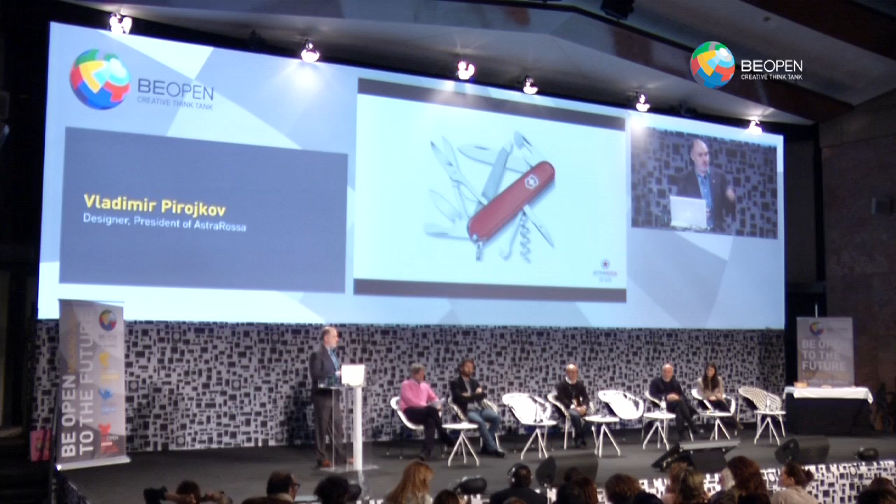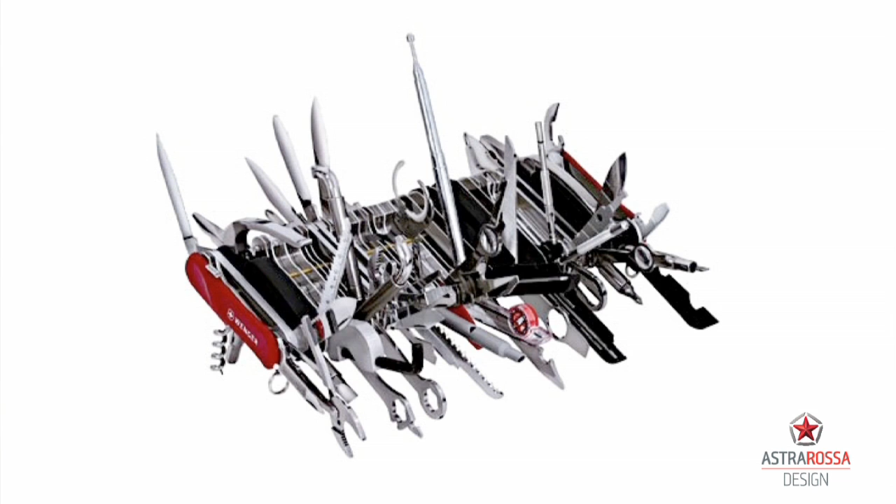If I will show you this little thing, when I was a kid I wanted to have one of this. Then things become more complex, and even more complex. If I ask you what this is, maybe you will think about it. But then things become even more complex, and that's all our life basically. We are not anymore realizing what this is - maybe it's a radio, maybe it's a flash card, or whatever.

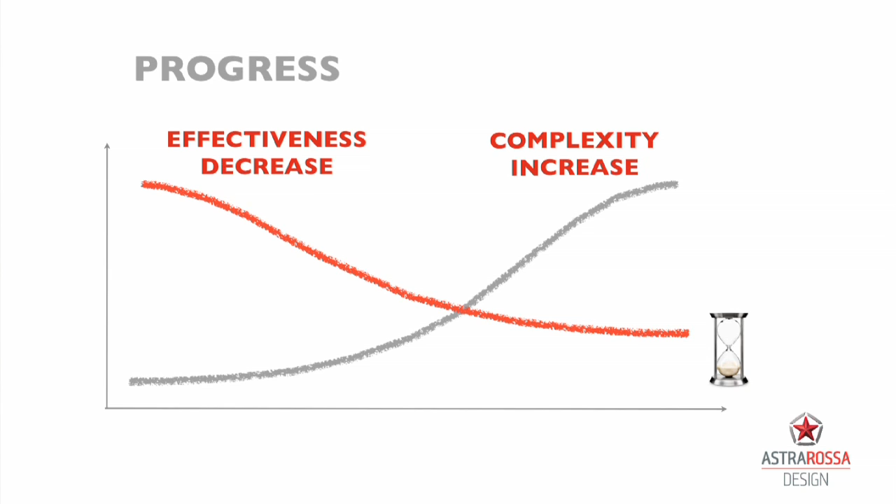So if you look at the situation, the more complex things or processes are, the less effective they are. So the time is to make things simple. Basically, this is about the control of complexity. And if we can control the complexity, then we are winners.

And how we can see this, for example, for our little knife - the control of complexity relates to the size of the hand. The bigger the thing is than the hand, it's not a knife anymore.

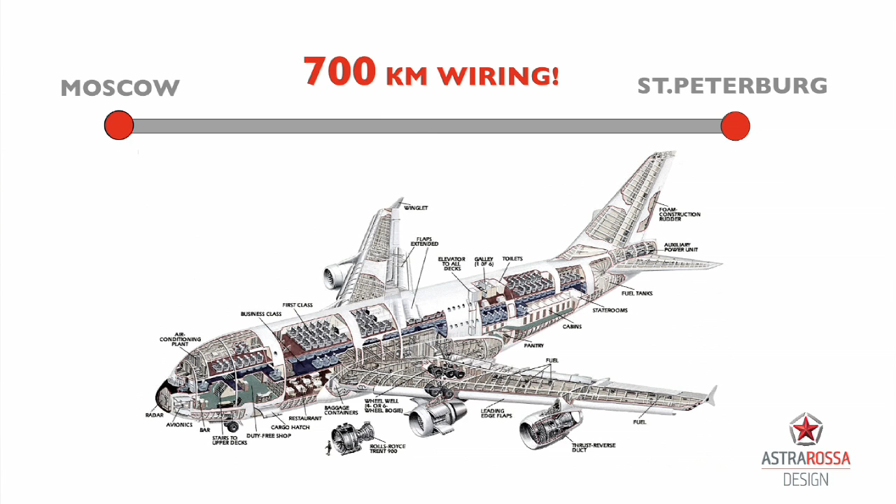So if you look at the modern airplane, it's about 700 kilometers of wiring inside the airplane - like the distance from Moscow to St. Petersburg. In order to certify the A380 airplane, it took 6 years to try to understand where the wires are. In the Boeing, there are about 3.5 million certified parts. These are very complex objects.

So what we can do, our exit from it and our solution, is innovation. If you look at this simple thing, if we go progress, progress, progress, and at one moment when we control the complexity and stop going even more complex, we can jump to another physical system.

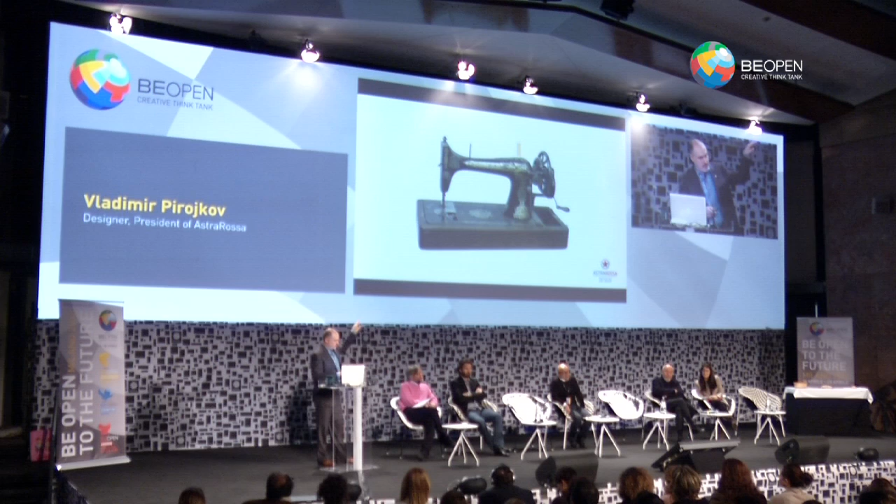For example, if you look at this thing, guess what it is. You think it's a sewing machine - maybe, maybe not, but it's the very first sewing machine from Singer. This is modernization of this machine - about 50 years between the first and second one. This is the modernization, but this one is already not very good because it's electric. If I go back, this one works on bread and meat.

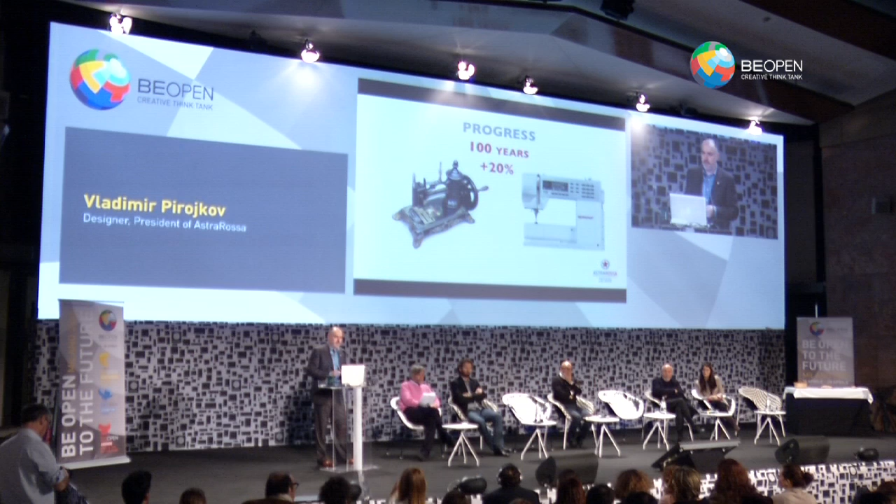But this is innovation. So if the thimble has a nano surface - super complex and very, very expensive thimble - it's not at all like the very first sewing machine. Basically, this is the jump. This is 100 years of progress, of modernization, and we have about 20% of effectiveness gain in that 100 years of time.

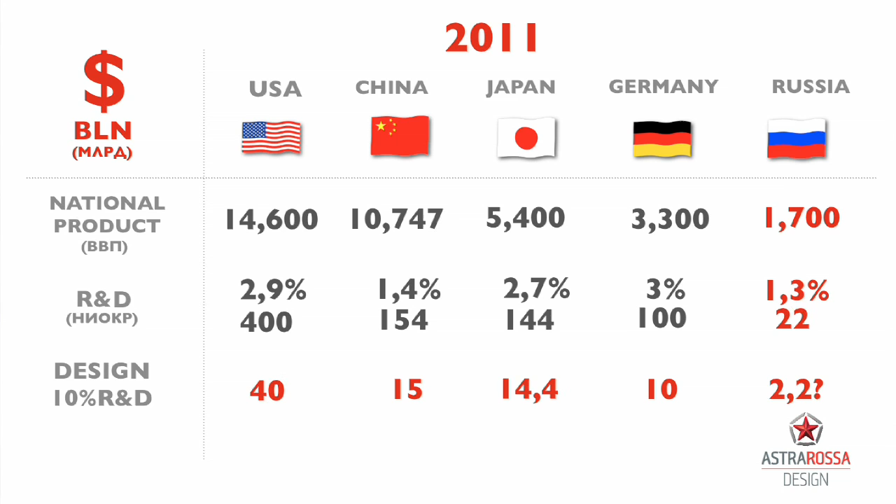We can talk about innovations as much as we want, but countries are investing different money in it. If you look at the national product, this is the size of national product, and this is R&D investments. I won't talk about design because different countries have different approaches. But if we compare, for example, America and Russia, there's a very different level of investment in innovation.

So our choice in Russia, because I'm from there, our choice is only innovation. We cannot modernize things because America, Japan, and Germany are going very fast forward. We have to catch up. So our choice is between progress or innovation, and we chose innovation.

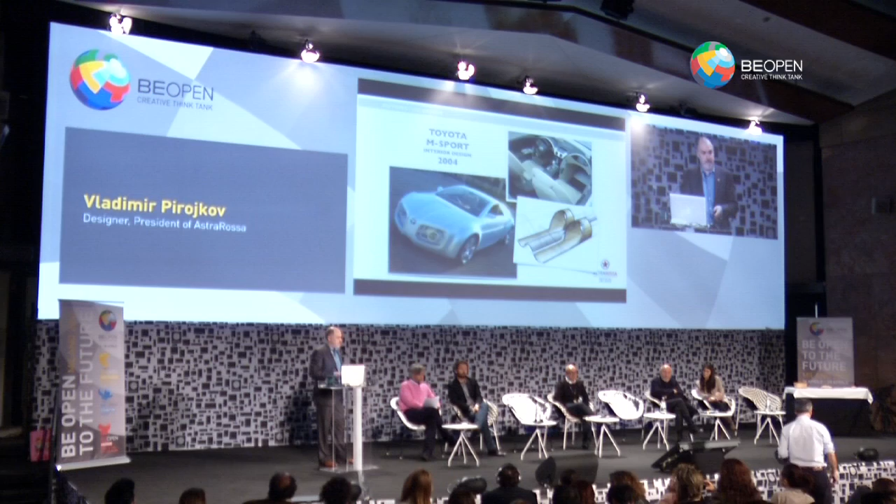Very quick about our background. I used to work as a car designer, and maybe some of the cars here you will recognize. It was a team which we were working together. Before that I was working at Citroën, and after, as we all grow, we go to bigger companies. I went to Toyota, doing Lexuses, Toyotas, and many different cars. You can do cars for all your life, doing 20, 40, 100 cars, and that's all the cars we participated in.

In the end of the day, I ask myself, what am I doing? I'm doing another car, another car, another car. Finally, we end up with a choice: I can do another 100 cars, or I can do something different for the human being.

And there we go to the question of happiness. For example, you are working every day at the company, you go in there and say, I'm doing cars, it's cool, it's really a dream, I'm a car designer, a really happy job. But in the end of the day, you say, am I happy? And I say, maybe not anymore, because I'm doing another car. You may be doing another shoe, or something exactly the same as yesterday.

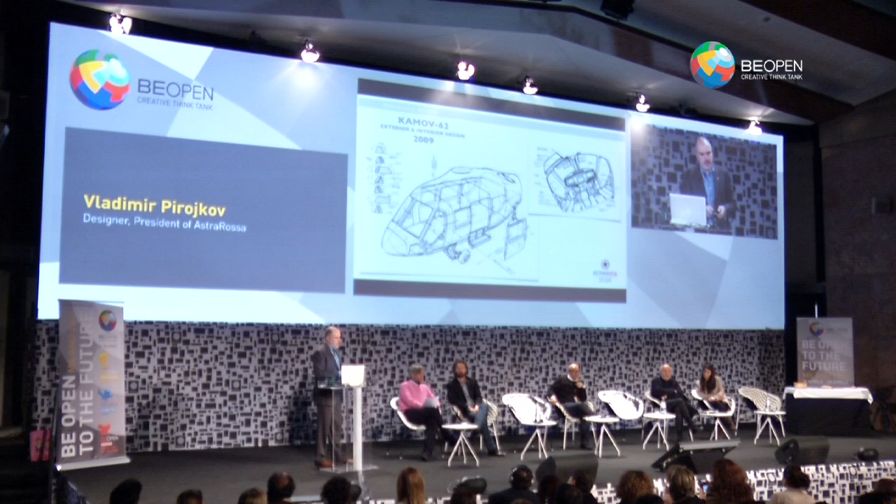So for myself, I chose to go the innovation way, and we started to work with the aerospace industry. These things are very simple, and they are also part of the modernization way. This is the job we were doing: helicopters, airplanes, but they are always the same.

This is an interesting thing. We started to think about the future, and in Russia we have a very serious situation with the Arctic North Sea. Very soon, when the ice melts, we will have a highway between North Europe and Asia. This highway is very cool because it's about 7,000 nautical miles shorter than the Suez Canal route and has no pirates, which is very important for the modern world. But at the same time, we realized that in this area we have no infrastructure at all, so we need very heavy helicopters that can carry huge cargoes of weight to support this infrastructure.

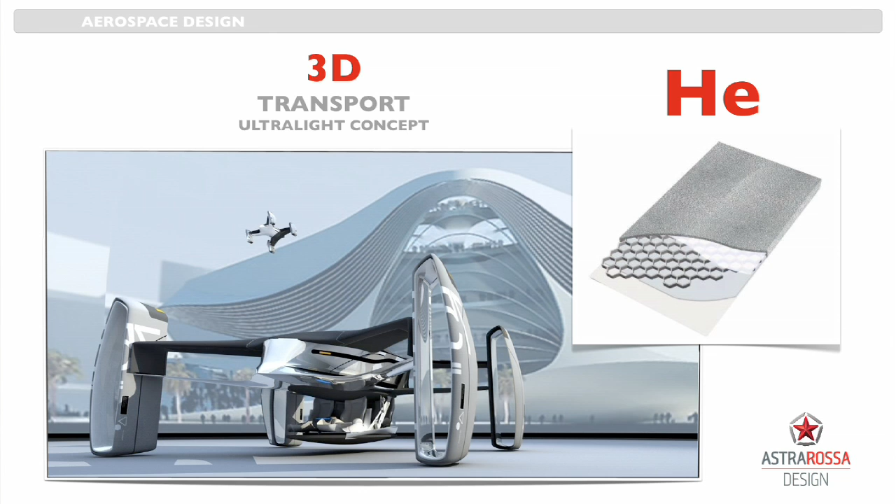This is an interesting development of the idea of how to make this area work, because if you look at any kind of flying machine, you have to understand it should be very light, otherwise we have no chance to lift it up. So to make things lighter than they are now, we are going into composite materials with a helium filling inside, instead of oxygen. Then the wings and anything the machine is made of become super light, and you can have smaller engines, maybe electrical engines, which is very important for our world at the moment.

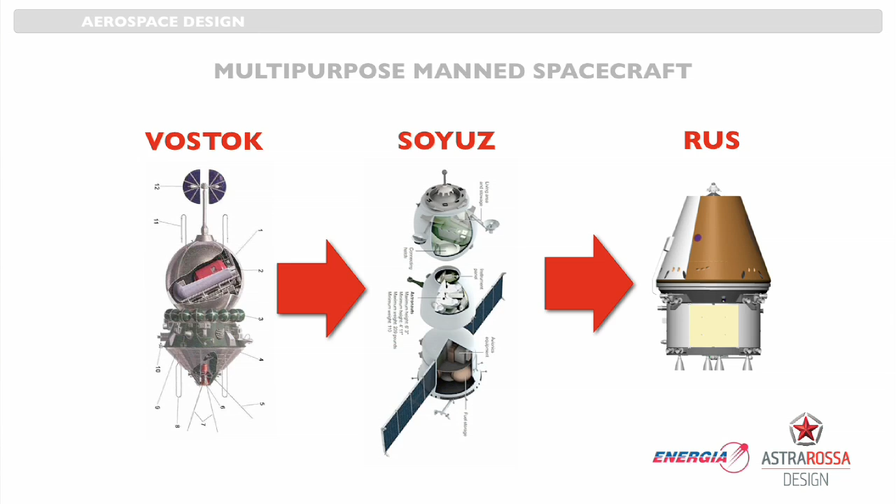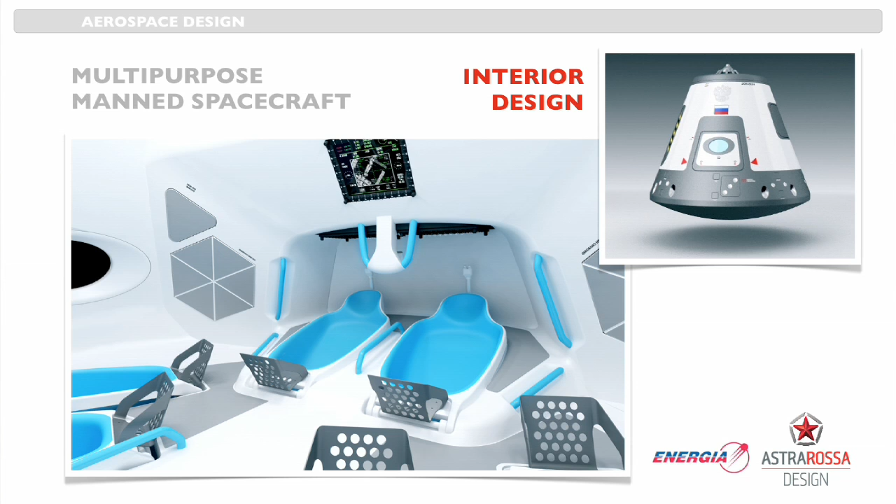We also worked on a very interesting project because there are two countries which are very powerful in space research: America and Russia. In Russia, we were always flying with very old machines. Now we are going to the next generation spacecraft. We were working on it, and this is just to show how the job was done. We were designing the interior of the next spacecraft. This is the machine, it's a huge one.

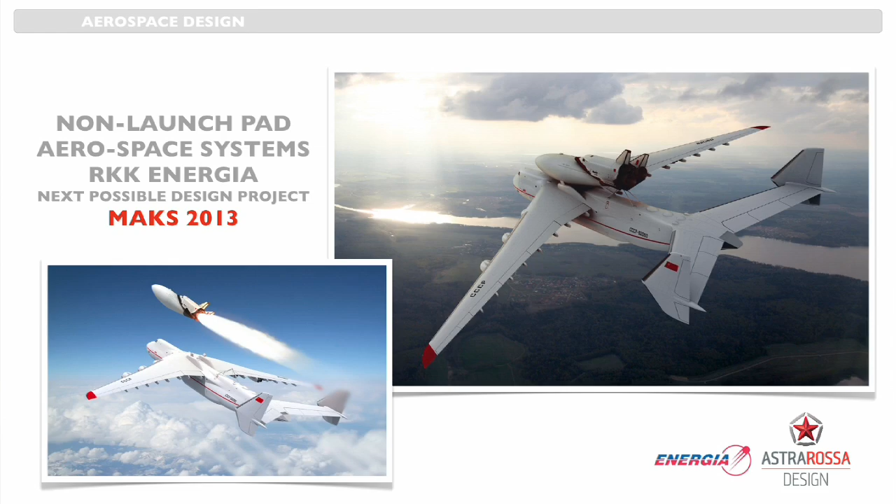Sorry, maybe it's not about happiness, but it's about necessity, and it's for the next 50 years of space research. This is the next project we are working on: spacecraft that can go into space without launch pads, meaning you don't have to start from a fixed point, which is vulnerable.

But the very cool project which I want to tell you about - I'll be quick. For 120 years, we've been using cars, and we were so happy when we went from horses to cars, and it happened in 10 years. When Daimler and the other guy created the engine, they made a new vehicle which moves without a horse, and people accepted it. In something like 10 to 20 years, we forgot about horses. Try to find a magazine now about horses - maybe it's impossible. And we had been using horses as a moving device for 100,000 years. So we got rid of horses very quickly.

Now is the next step, and this is the question of how the world is changing. If you look at navigation, it used to be analog. Now we go digital, and some girl tells you to turn right or turn left, and I don't care who she is or what she's made of. It's just comfortable, it's cool. We go into the network systems.

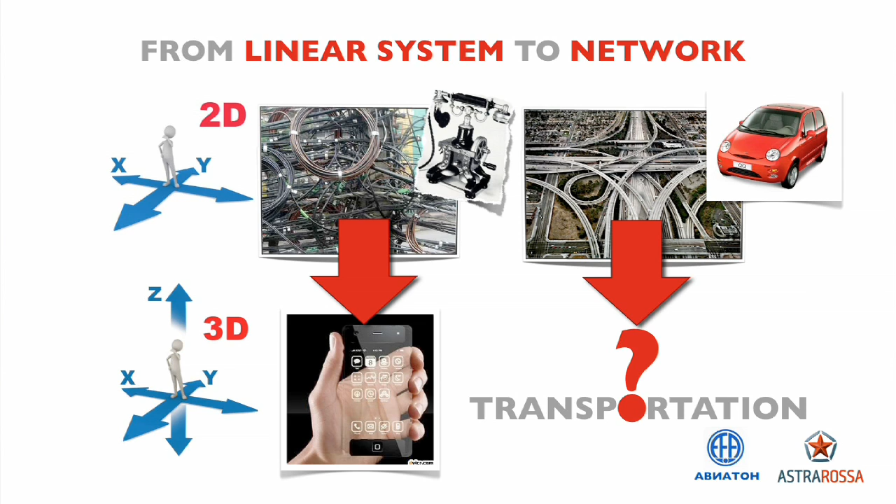But in transportation, we are still stuck to the roads. And the roads are very simple - you have Milano-Como, and that's a problem, because everybody stands in traffic there. And if you want to go off-road, impossible, because there's a building, there's a factory, there's... I'll show you what it's like in Russia, maybe you'll enjoy it. So basically, we are fixed to the wire of the road. Where the road is, you can go. There is no road, no go.

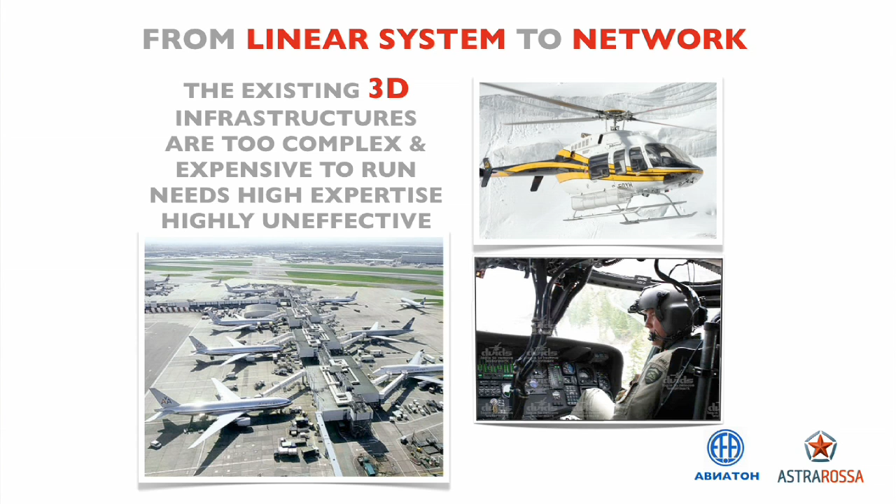At the same time, we have three-dimensional transportation, but it's super complicated. If you go to the airport, you have to spend about 4 hours driving there, again through Milano, Como, and then you have to undress, dress, undress - especially in America, and I don't know why. In Russia in 2008, before the crisis, we spent about $70 billion on cars. That's a huge amount of money.

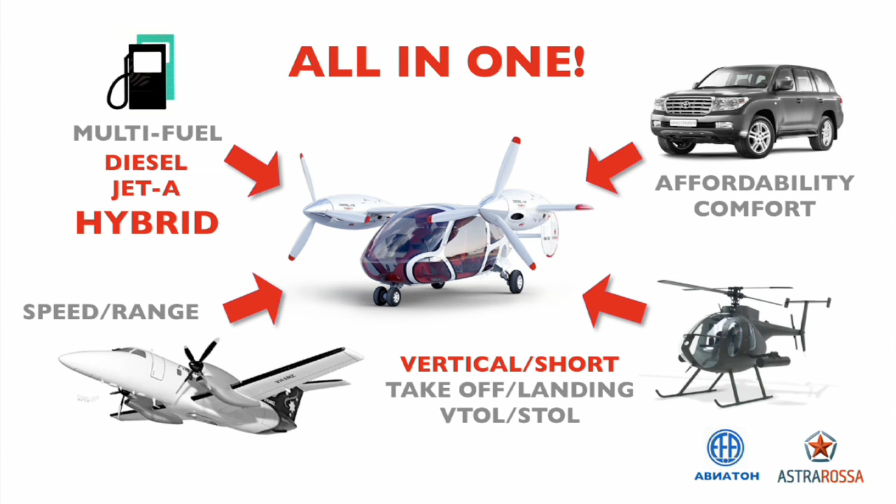This is the personal vehicle for 5 people with the price of a car. Basically you have all-in-one: the speed and range of a good, expensive airplane. You have vertical takeoff and landing, which is very good. You have the price and comfort of a car, and a multi-fuel engine. You can put anything that burns inside for the moment, but next step it will be hybrid and electrical.

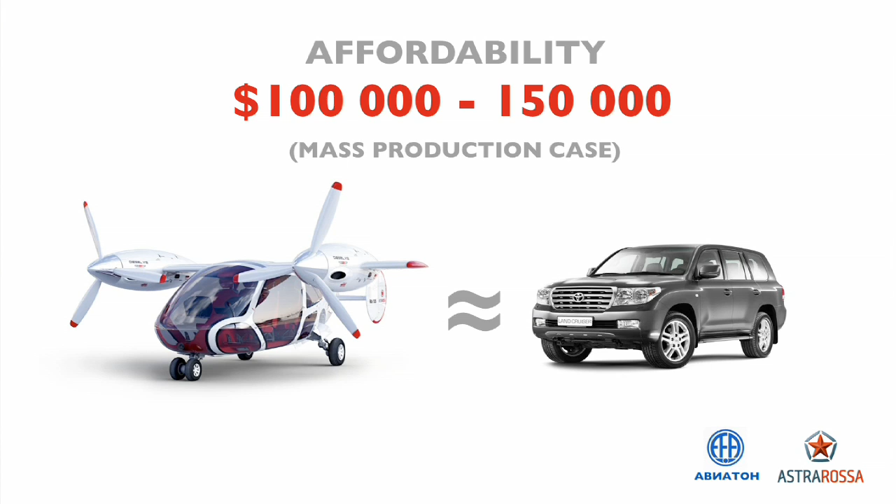It will be assembled in an assembly line. The price will be about this. For the moment it's expensive, but if you remember the first mobile phones, they were also big and expensive, and that was only 10 years ago. Now you can get it for free because it's a necessity, and it's inevitable. And this one is inevitable too. Maybe we will not be the first ones because everybody is working on it now, but we already found the engine for it, and this engine is a diesel.

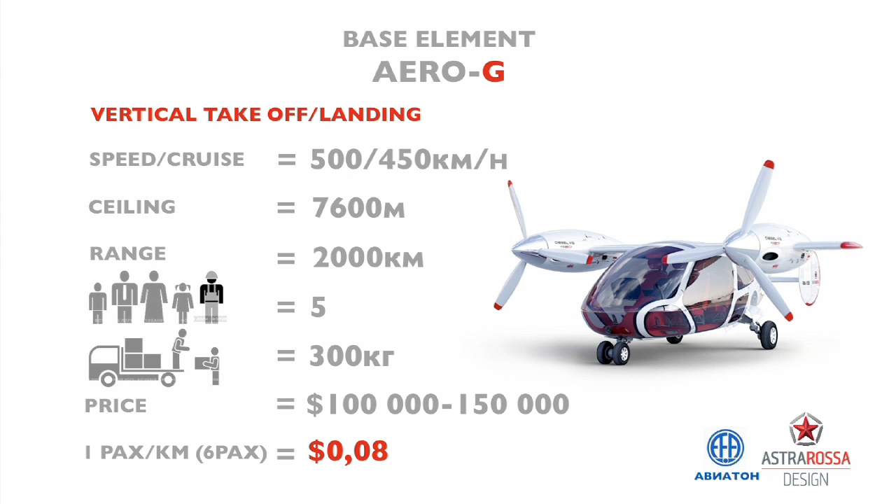So basically, on every fuel station in the world you can fill it up. The cool thing about it, it's very quick: about 500 kilometers an hour. That's about 8 kilometers height, the ceiling. It's about 2,000 kilometers range, so you can fly really far away. And it's about 5 people and 300 kilos you take with you, like a normal car. So this is how it looks like. For the moment it's like the very first mobile phone - sorry, the very first black one, heavy. So don't worry, in 10 years it will be very, very different.

It's a robot, it's a drone. You don't need to really drive it, it will be driven by different sources. You have safety and security, of course, because we're always afraid of what will happen to us. So we are very, very conscious. You can get personal credit in the bank, go and buy just like a car. It's a multi-weather system, and of course you need infrastructure for that. The very first thing to do is make it unmanned, so it's a robot, you don't have to control it.

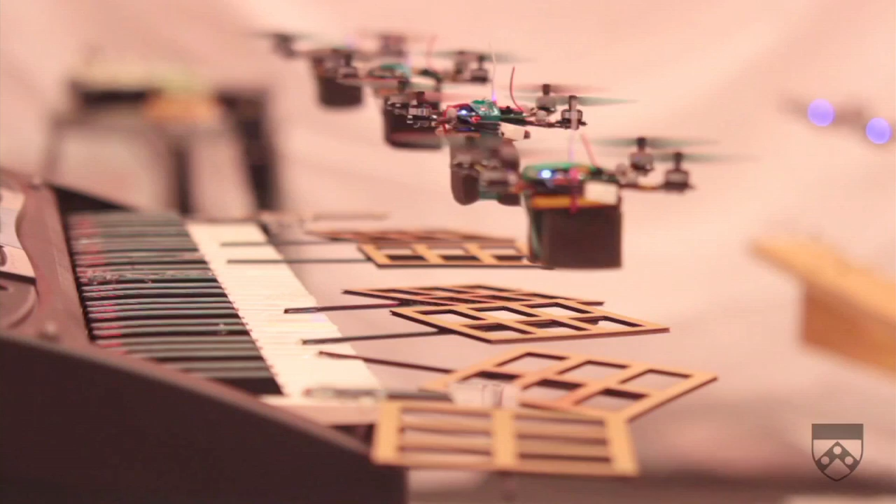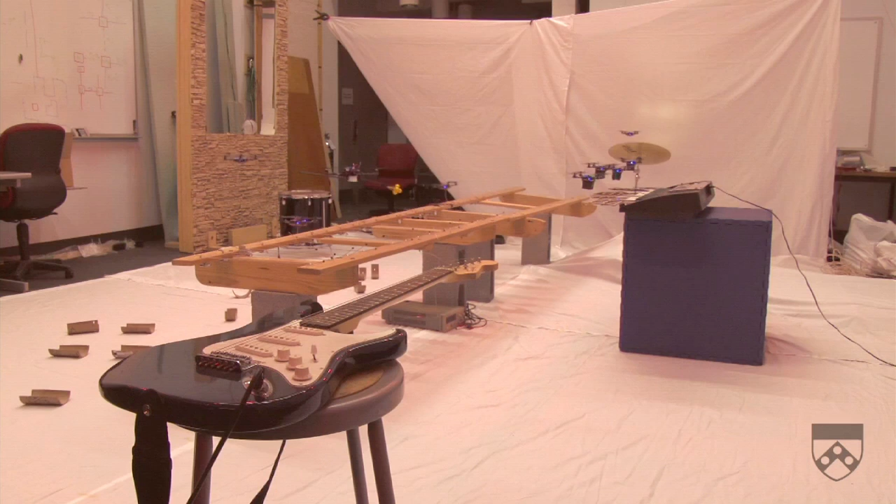If you see this, here's a fifth element story. A little bit louder, please. This is robots. It will be James Bond movie music by robots.

So the aim of our team is to make a device where you can fly anytime, anywhere, and that's another part of freedom. When we got a mobile phone, we got super freedom. Now we can do anything from every cafe, you can call any car. This is very cool and amazing, and we don't realize how cool it is. This is the next type of freedom, when we can transport ourselves.

I'm bringing you back to this little situation. Try to imagine for yourself, on your place, what you can do like this. What you can do as an innovation, not modernization, because every day we go to work and do our Toyota. I was doing Toyota for 20 years, and I got fed up with it because it's just another car in the traffic jam. Any new car you see in the shop, it's just another car in the traffic jam. So my breakthrough, my happiness, and my attitude to life changed. So we are going this direction, and basically we are creating our little world, and we want to see it this way. Thank you very much.